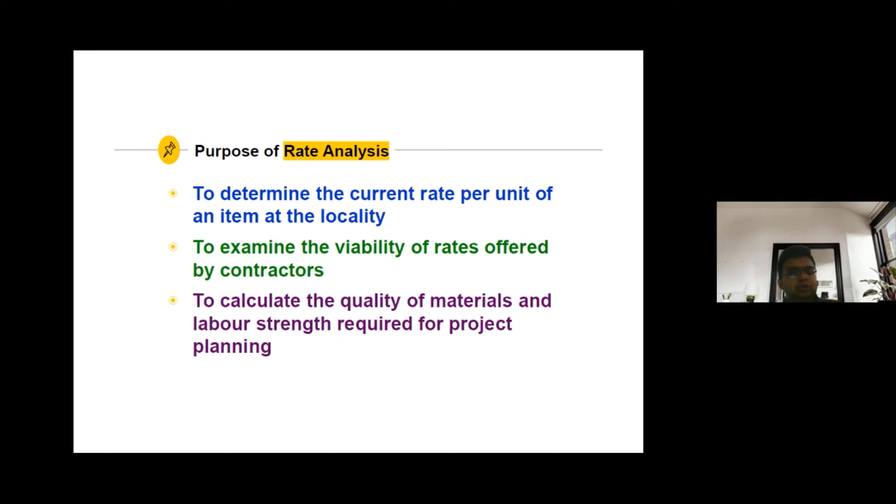The purpose of rate analysis is mainly to calculate the quality and quantity of material required according to the measurement for each cost item, done in the construction part as required for project planning at execution level. Each item is associated with a cost, depending on the unit of measurement for each prevailing cost. You multiply the unit rate into the quantity to get a total cost.

If you see the flow, there is the type of labor involved in the rate analysis, the cost of equipment or tools engaged, and some overhead charges. These overhead charges will be seen at the last stage of my presentation. First we will calculate the rate amounts with some examples, then we will cover the overhead charges later.

Starting with the detailed technical concepts of the presentation on rate analysis: the rate of a particular item affects the final rate decided, studied carefully. Each item's rate affects the detailed items, adding up on each task of the activity to give each cost data. So the main purpose of determining rate analysis is the item rate of items that could be floated, termed as rate analysis.

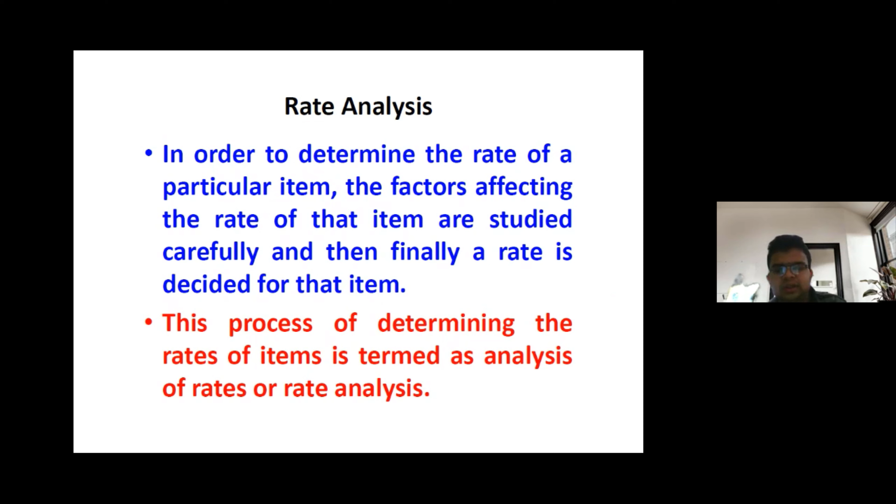The analysis of rate, if you see as part of construction projects in India or anywhere overseas, there could be a large number of activities that could have been split up.

Every construction activity consists of different types of civil or construction parts where you execute activities. As discussed, I've given a detailed example for students to understand where the analysis of rates could be prevailed, and they could come out with a detailed analysis part, with examples in construction buildings like excavation, earthwork, concrete work, masonry work in the substructure.

If you take any activity from the start of a construction project to the superstructure level, or come out with finishing activities, or MEP activities - for each activity there is a cost involved associated according to the BOQ floated in the pre-tender stage that will be executed by the contractor. These are some of the examples.

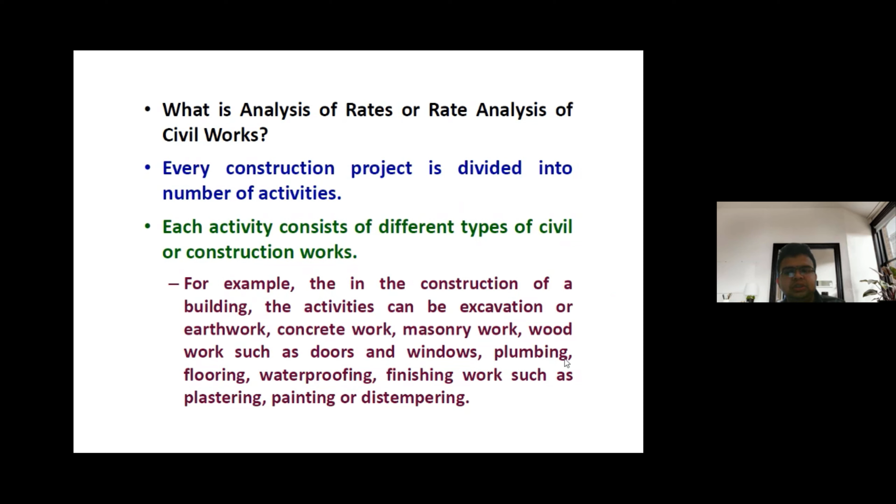Coming to the next part of the presentation, take the activity of earthwork. Suppose if I'm taking earthwork that could be divided into number of types based on the depth and type of soil conditions.

Suppose if I'm taking an MGL level of any kind of clay soil, and I want to do an excavation for 3 meters from MGL level to the bottom - from 1.5 meters you could associate soft soil. This is an example where you could understand detailed analysis of rate that could be floated here: excavation of 1.5 meters deep into soft soil, and excavation of 3 meters in hard soil.

So there are two variants you could come across in the presentation, identified in blue color mode: soft and hard soil. If you're doing 1.5 meters in soft soil, there could be an associated cost prevailing, because I need to do all my equipment, machinery, and all the resources that are engaged.

Soft soil is rather easier compared to going 1.5 meters below the level to reach my 3 meter level. So here you can see one variant is soft and one variant is hard. In this case, you could understand the analysis where you float from the variance, changing the level meter from 1.5 to 3 meter.

Here you could find that for 1.5 meter, the condition could prevail for the process of flow to happen, and for the next 1.5 meter where there is a hard strata, you could find another level. So here you will have various determined rate analyses that could be floated.

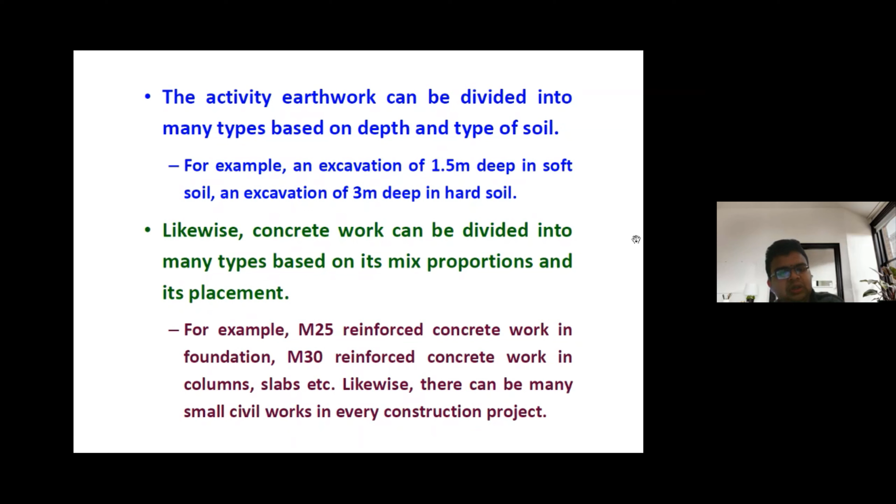Going to the presentation, here I have implemented some case studies so students can understand in detail the concrete mixed proportion, both theoretical and practical values, where we have done the rate analysis and how we could implement the analysis of rates pertaining to the original BOQ.

Before going to the flow of the presentation on concrete mix, I could say BOQ is BOQ - bill of quantities - where the quantity of each item, rate, or scope of work that you need to perform in execution, procurement, or at the pre-tender stage is determined in detail.

For each item, an item code is given, and you could find the length, breadth, height of each variant of the activity, along with a remarks column showing whether it is DSR or non-DSR. DSR means Delhi schedule of rate, according to each item of rate that could be preferred, or it's a non-DSR item.

So BOQ plays a vital role in any construction project where you're doing your execution completely, pertaining to the activity part. Linking why I would talk about BOQ - without BOQ, the analysis of rate could not be done properly.

BOQ is a justified document, a very authenticated document, where you could find the contractor has floated an amount of rates to pursue an activity, which he submits at the time of the running account bill, where the execution has already been completed.

Coming to the flow of the presentation on concrete mix - I have given for M25 grade of concrete, the ratio is 1:1:2. So if you need 4 m cube of M25 concrete, we need 1 meter cube of cement. This is the theoretical value I have put up in the presentation.

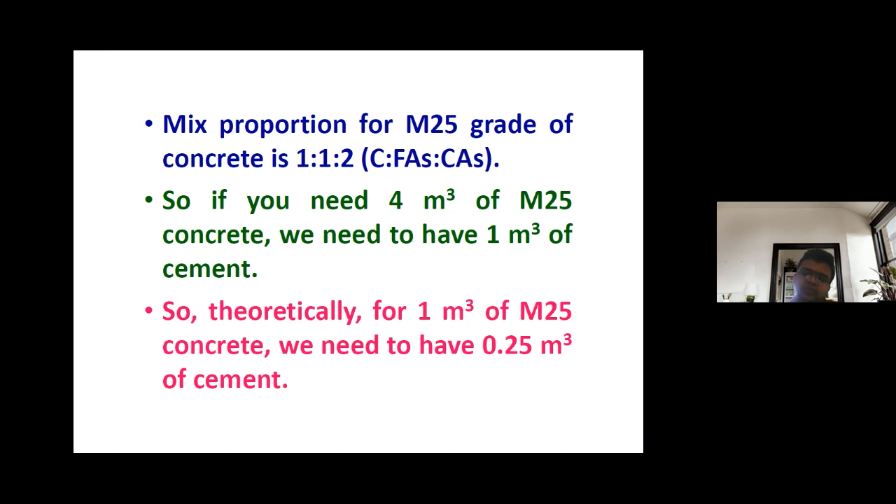Next, in the designation mix, I have given for each cube strength that you need to achieve. You know some cube tests are performed for 28 days to achieve the strength of the cube, pertaining to site level activities like slabs, columns, and RCC walls.

These are the molds which help determine accurate target strength. I'm not going into complete concrete technology and design parameters here, but the mix has some parameters that could be understood.

So the order is given so you can understand how to come out with various mix proportion grades according to where the rates fit exactly, and find the analysis of rate of flow for each item of work executed, if split up into detailed construction tasks.

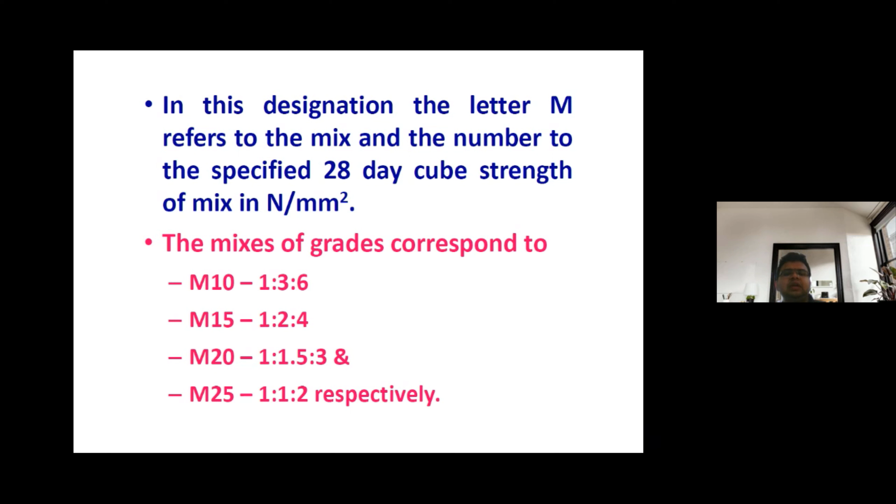So the cost of any construction project is calculated on the basis of each work associated with every construction. Each type of work you do for any activity or task can be considered.

Each task completed within the construction project is associated, where you add up all the costs. Then you get a complete picture of the cost to the particular item or task of the associated work in the construction project.

This is very essential, whether you're estimating for a small work or a large work in a construction project.

Suppose you take any site, or attend to very large projects, you'll see there are a number of activities associated to perform a particular kind of task.

For the task, you need to produce a detailed analysis of flow of rates, taking the scope of work already available from the authentication document, the BOQ, which we discussed before. Then you come out with rates, whether it's an item related to Delhi Schedule of Rates (DSR) or a non-DSR item.

If it's not according to normal conditions, if my remote site location has a prevailing rate particular to that state, you can take the local rates.

Some people follow a Delhi Schedule of Rates or normal local rates, which you fix for each item of cost associated, and multiply quantity into cost. This is rate analysis.

Analysis plays a vital role in civil engineering. From my point of view, going through this analysis determines the complete picture of cost concern, which you do for each construction activity, per unit of quantity.

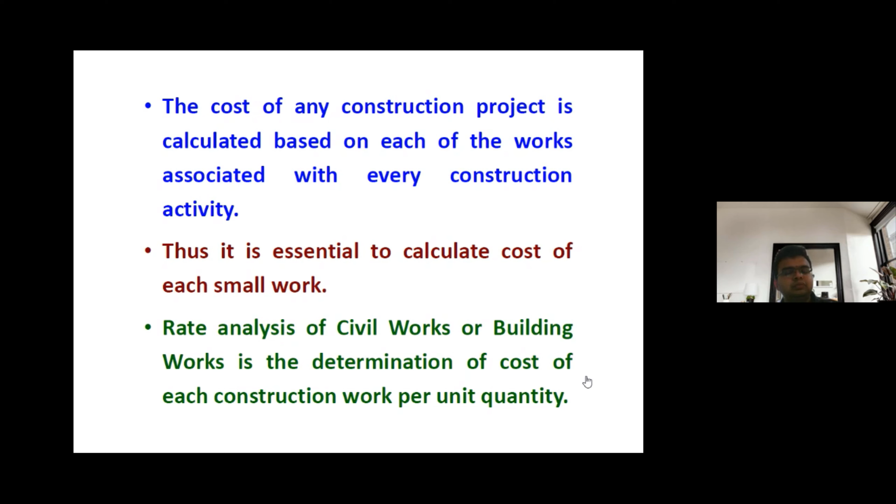Coming to that, the cost includes the various costs of materials which you procure from your store to the site or from anywhere, along with labor cost and machinery cost.

There's also the contractor's profit, where he adds his profit while floating a BOQ, with prevailing fixed rates depending on the type of contract. He gives the type of rates from his end to float the BOQ, covering each scope of item associated.

So here we have discussed the RCC work. I have added some recall examples for you to understand, for example, the cost of 1 cubic meter of M20 RCC work in slab and the cost of 1 cubic meter of excavation in soil of 1.5 meter depth.

So you need to do RCC work, the cost of the concrete quantity in cubic meters involved, and you could come out with a detailed flow of the analysis of rate, arriving at various cost parameters - where my cost is associated, what is my pre-estimate cost, and what is the cost given in the BOQ, which is an authenticated document. So what is my cost?

For example, if I'm going to do a square meter of plastering of 20mm, whether external or internal plastering, per square meter, here you can find examples of various specified items of work that are executed.

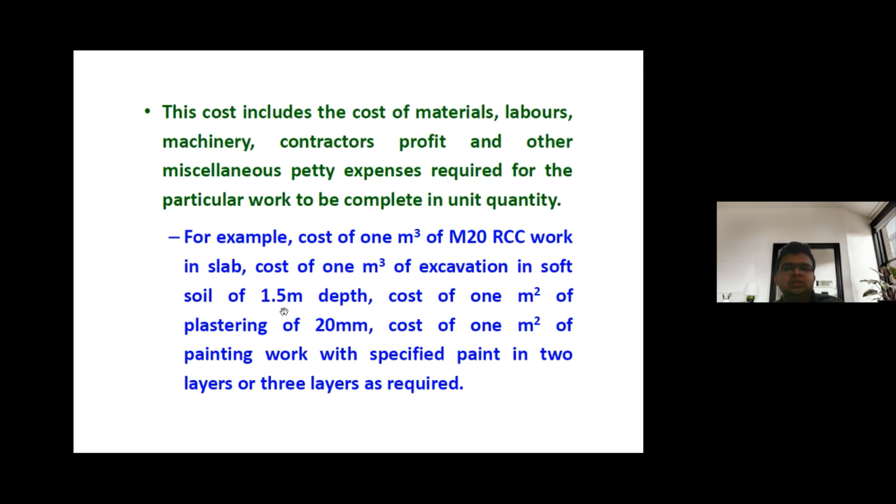So the cost of materials in the analysis will be calculated as a combination of both material - the original cost, transportation cost, and all the incurred miscellaneous petty expenses and overhead charges.

So you have the cost and transportation cost. Suppose I'm going to procure material from various sites, from the factory or fabrication unit to my site - the cost associated with lead charges, where the material is dumped, where it exactly fits into my site, and made available proportionately before excavation or before execution.

So you can find the various costs associated compared to the building-wise analysis point of view. If you see the third part, there are labor rates, where you find various classifications of labor analysis based on Class 1, Class 2. In the detailed daily schedule of rates, you find a systematic analysis of rates given according to Bhisti, Khalasi, skilled labor or unskilled.

Each analysis has the prevailing rate, and you come out with the various items to be executed. For example, as discussed before, for 1 cubic meter of concrete for RCC or raft foundation, you need to figure out how many resources to procure - depending on shuttering activity, reinforcement steel work, fixing the box for the raft, and complete concreting.

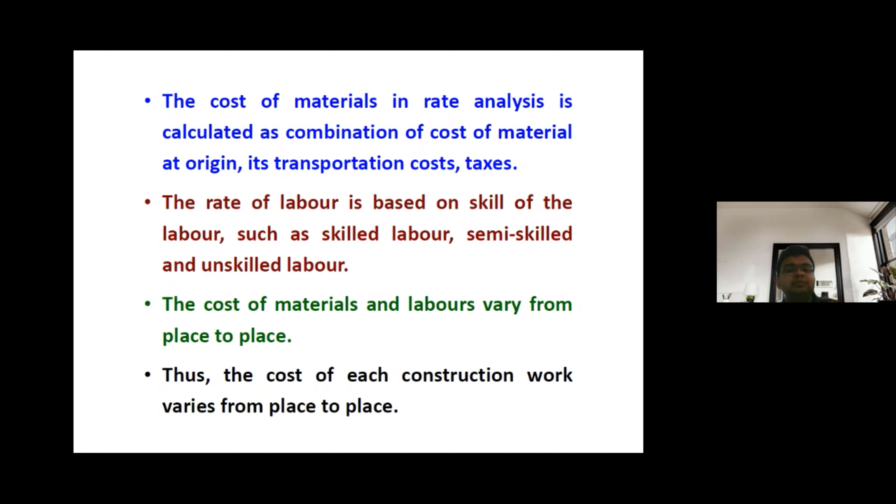So the need is mainly to work out the details of various elements constituting the cost of each item of work, where you work out the various cost elements and compare with the analysis. All the cost parameters could be implemented, so I need to discuss some analysis mainly needed in construction site working.

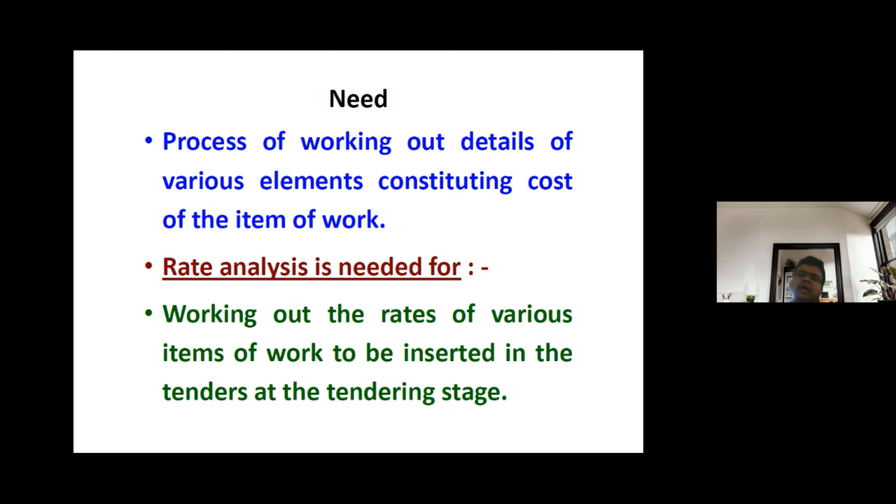The analysis of rates is used for working out items of rate to be inserted at the tender stage, where you could float a NIT in combination with CPWD or FIDIC projects. Here the contractor has to publish a rate, which is a very important authentication document where all rates could be performed and taken when the execution strategy is performed at the site level, combined in a way that I submit my running account bills so the rates exactly fit in. This helps in checking the reasonability of the rates to optimize the use of labor and machinery.

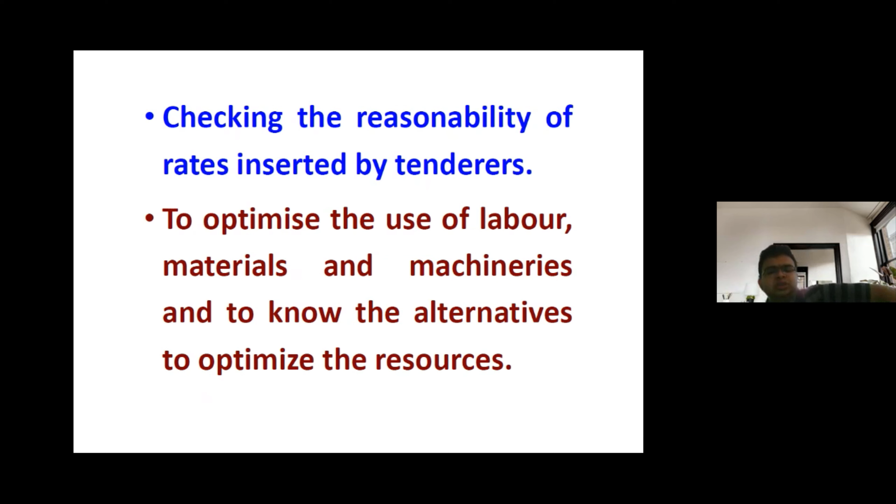So to optimize the resources in tendering, the contractor may easily calculate the cost per unit part of work where he could be involved in the various construction activities while quoting the rate.

In the Indian construction context, we could see some contractors float all the rates where they exactly fit in and come out with various rates for each unit of work, computed for the amount of execution or fixing for any kind of activity. This quoting of rates is involved in each construction activity for the justified quoted rates, which is already done at the pre-tender stage.

The client may also require the rate accordingly. Whether the contractor is in pre-tender, construction or post-construction stage, there's a strategy cycle where we compute the time-cost analysis. In the pre-construction stage, they do the entire analysis of rates. So if you take stage one, stage two, stage three...

In stage one, I do all the analysis. In stage two, depending upon the complete work, I get a picture where I could exactly do my execution and fit in. Compared to the contractor context, I could completely do my analysis.

In stage three, the client also has to know exactly what the contractor has added - is he adding profit charges, all the miscellaneous petty expenses, or submitting accurate rates equal to the client's expectations when procuring a fixed or other type of contract. The contractor gives a complete analysis picture of rates which the client could accept and calculate, since the owner is going to pay the complete cost while the contractor has to build and hand out the project. So he has to calculate the cost of each construction project where he exactly fits in, or accepts the values of the rate quoted by the contractor.

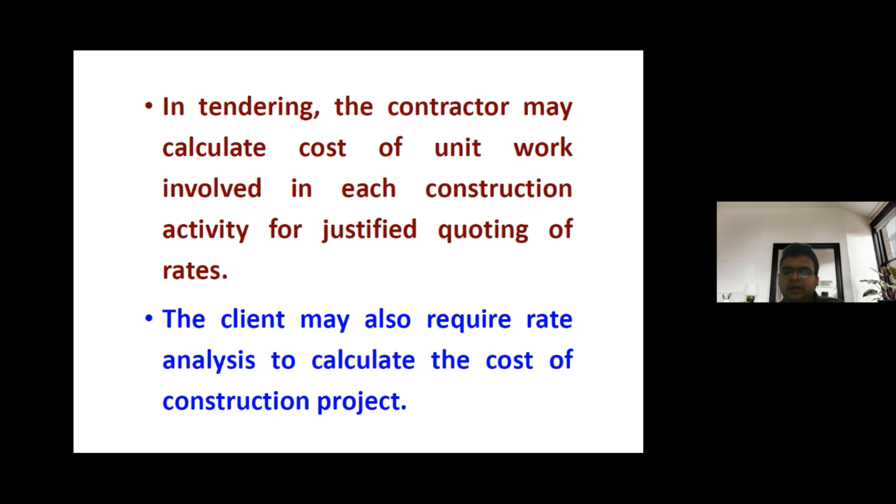Here you can assess the requirements of quantities of labor and machinery that exactly fit in, and what is the capital amount of work needed to complete the project—whether it's a huge raft, a G plus 12 high rise building, any finishing activity in each construction activity, or a unit item of work, along with time to time payment increases in material.

If you see some current prevailing conditions, like the huge impact of economic crisis where construction work has been stopped, the rate given in the BOQ could not be prescribed as current situations couldn't meet this factor. In this way you work out escalation prices, or cases where labor are unable to work at various field construction sites.

Then you come out with various analysis where the client or contractor plays a huge role, where the quoted rates will be fixed, or the authenticated BOQ needs to change, or they should submit an extra cost or item where labor or resources need to fit in for execution level in the construction projects.

So coming to working out the rates of the extra item or work to the builder based on actual cost—actual cost plays a very vital role here, as seen in the last point highlighted in blue. Actual cost plays a very identified role in a BOQ.

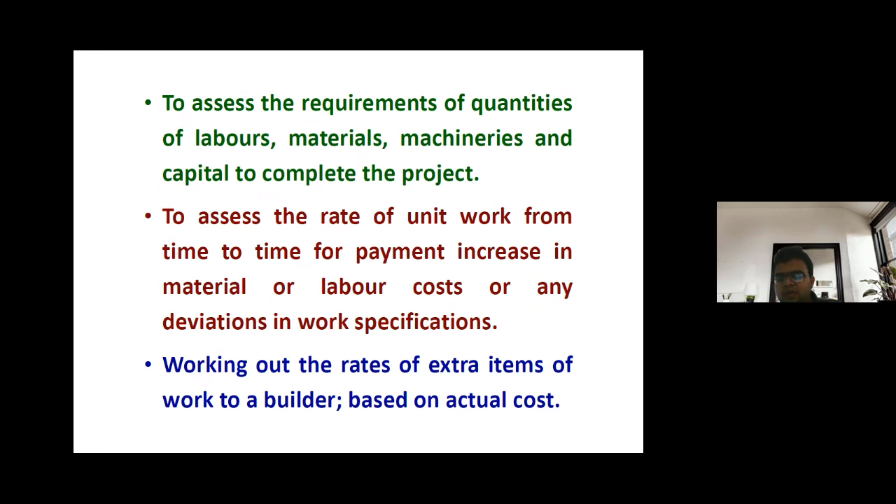So compared to the cost of the project, there is capital sanction of the project to be taken, necessary access, some capital amount that could be released in such a way where I need to make all the budget constraints, do my analysis, and come out with cash flow consideration.

When you already have a quantity in a BOQ, which is a very justified and authenticated document, and you multiply it by the quoted price a contractor has already given in a pre-tender stage, you get an analysis of rate. Before you get a net amount value, suppose you get around 1 crore or 2 crore estimate for doing a huge excavation kind of execution.

Then you could find how I can arrange my budget or cash flow provisions in such a way to execute the other activities that have been planned in the other sequential level of execution.

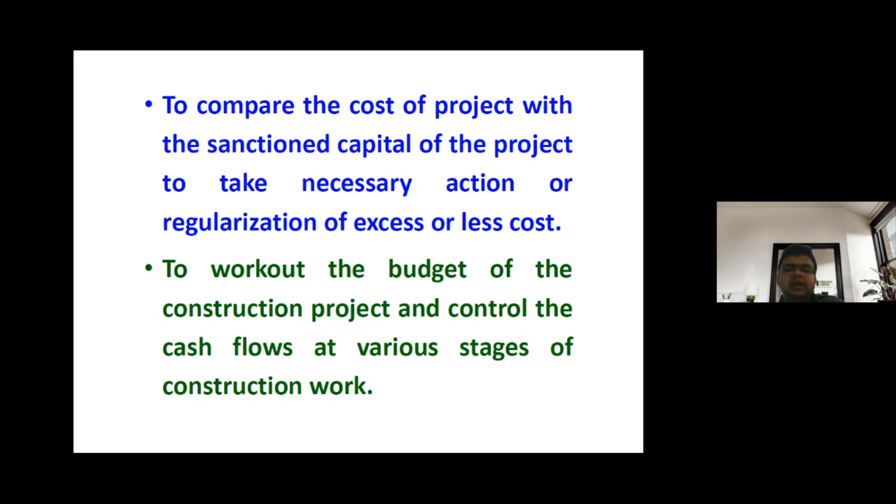Coming to the slides, you can find where irrational rates could be quoted. Irrational rates, in the sense, are various rates that could not be in such a way for each item of work quoted during the tender process.

It serves as a very basic data in case of a dispute among project between the owner and contractor. You could see if you quoted for 50,000 per activity, but during execution level, due to the current pandemic situation, the cost of work takes around 60,000. So there is a variation of 10,000.

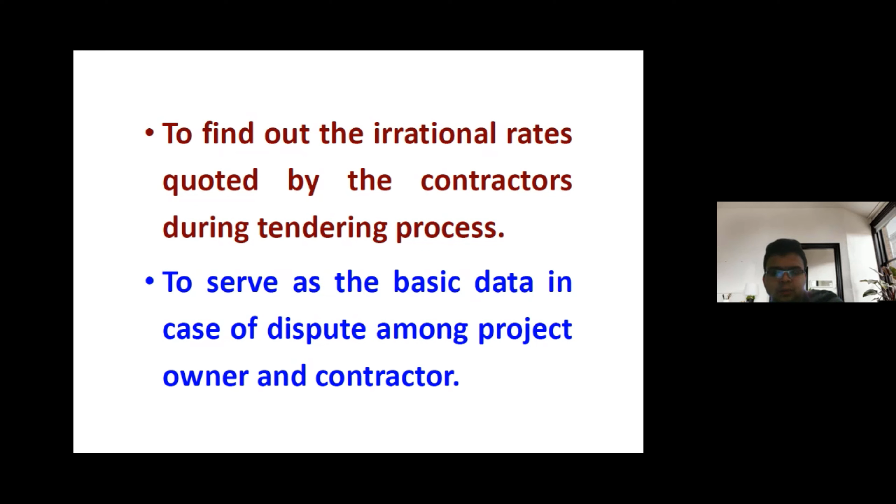So analysis of rate, or what is a justified document, you could come out with a BOQ that plays a very vital role in such a way you could fix a fixed amount of actual cost that could be defined according to the unit of measurement for each item, or for the resource constraint point of view.

Coming to that, to work out the economical use of materials and processes, to work out the cost of various items which are not provided in the contractual bond, it plays a vital role in the way the agreement or LOI work agreement has been provided between the contractor and the client.

You could see some items like the DSR or non-DSR items. Some items could be provided in the Delhi schedule of rate, while non-DSR, non-Delhi-schedule-of-rate items are those where some cost parameters have not been quoted by the contractor at the bid stage.

So it serves as a mediation authentication proof where analysis of rates could be computed, especially where the item of work is not mentioned in the BOQ according to the measurements.

So the schedule of rates should be revised to reflect increases in the cost of labor or material due to a change in technique. It involves various techniques and skills.

I need to perform strategies, I need to perform execution, I need to procure, I need to do any kind of activity where you could incur cost due to the condition requiring certain facilities, which increases the cost of material and labor due to the change in current situation.

You could take that as an example. So the concepts behind this, as I covered, help you understand the complete brief picture of the analysis of rates. Coming to the concept, understanding the various concepts of analysis of rates.

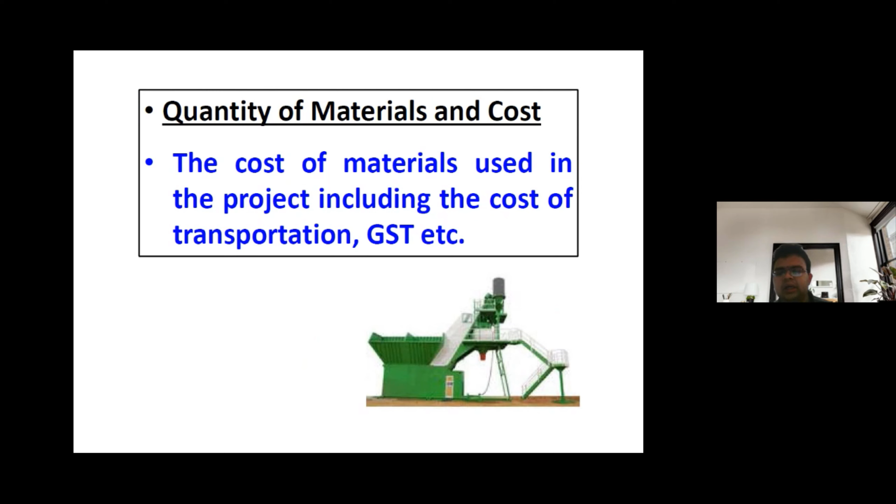Cost of materials at the source and site of construction are taken as delivered at site, including transport, local taxes, and other charges. Local taxes prevail according to the invoice, which gives a detailed picture of the analysis of rates when procuring any material, until you hand over the material to site.

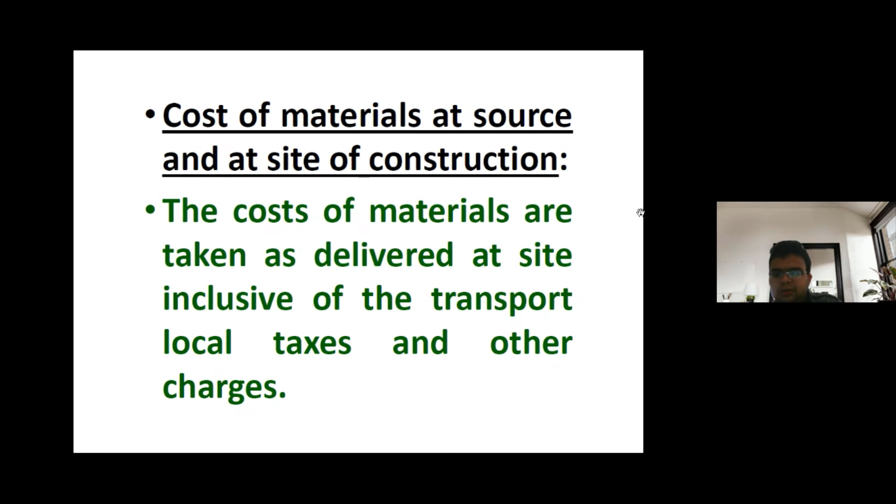Coming to other leads, some definitions here: when you do analysis of rates or a detailed analysis strategy, you come across terms like the lead statement. Here, highlighted in blue, the distance between the source of availability of material and construction site is known as the lead.

So the source of availability of material and the construction site - where the material is available to me and where my site is located - that is the lead.

If you take a lead statement and do analysis for procuring or fabrication, take newer examples like steel girders or beams or some prefabricated structure.

If you fit any material into this lead statement, you come across various charges, like needing to dump material in a wagon or big container, then adding all the transportation charges and freight charges.

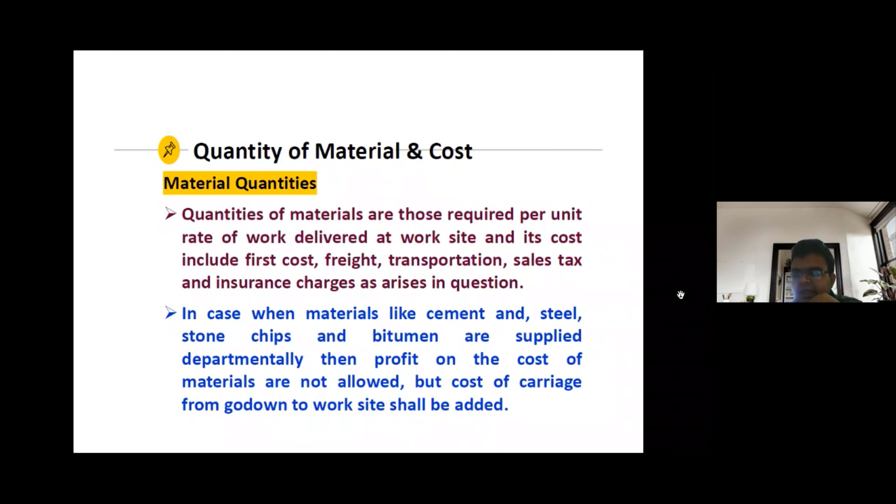Coming to this slide for your detailed understanding, you can exactly relate to the various cost parameters included, giving you a detailed analysis of rates.

This analysis applies in conditions where travel is expected over a minimum distance in kilometers, so the cost of conveyance of material depends upon the lead. The statement gives the total cost per item, for a number of items.

From invoice details, you come out with various statements involving how material should be uploaded to site, from procurement or fabrication strategy through to arrival at site, showing the various cost parameters involved.

This plays a vital role so that charges need not be borne by any third party. This mainly shows where exactly I can do my analysis of rates and prepare accordingly to purchase, buy, and transport material to site.

This plays an actual vital role - in cost detail, there are options where I could quote my lowest cost so that I could transport the material in such a way.

The statement gives the total cost for each item, including all costs - loading cost, unloading cost, stacking cost, all stacking charges, and all miscellaneous expenses - from there I could transport my material.

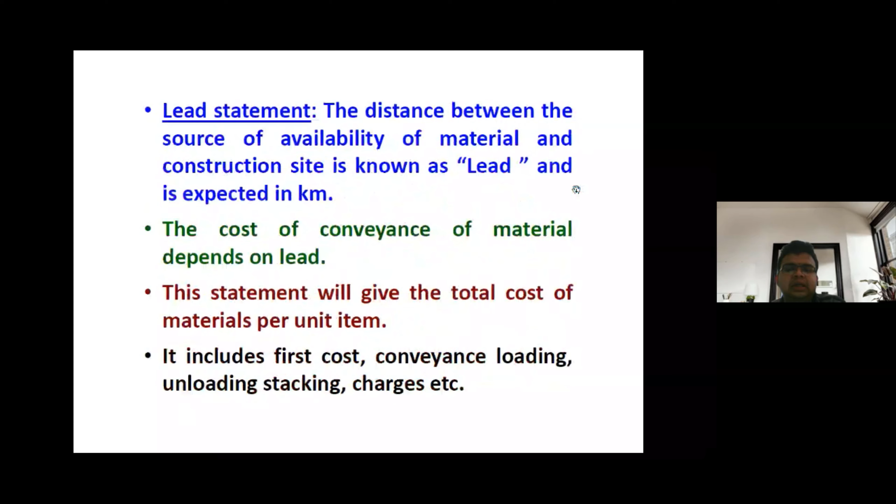Coming to the other slides, the rate shown in the lead statement is given here for metal tracks. This is research taken from other journals where for metal tracks and cart tracks, the lead statement is multiplied by a factor according to conditions prevailing on the metalled road, depending on the situation where transportation could be safer, to transfer material from fabrication to site level.

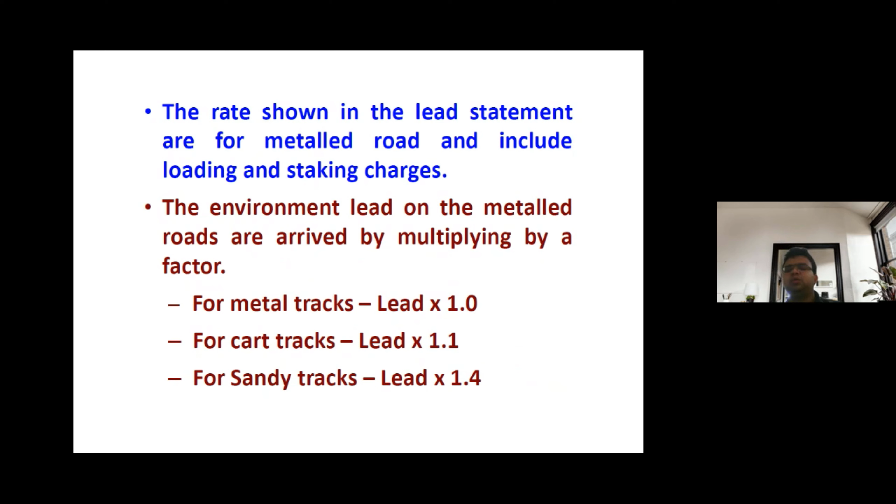Coming to the third part of my presentation, you could see some of the cost association concerns. Until now, we have gone through the detailed part of how we could do analysis for each construction item according to the unit of measurement.

In the second part of my presentation, I covered material concerns or lead statements. We went through some of these concerns so I could come out with all my stores or procurement levels where cost is associated with cost parameters, and did a detailed analysis on the flow showing how the cost of each item is involved in various roles or cost parameters.

So the third part of the presentation is labor cost, which plays a very vital role in construction projects in India, where you have different kinds of labor depending on skilled or unskilled status, and each unit of work that could be done. Compared to the Indian concept of projects currently, we convert to man-days and man-hours per day.

I need to work eight man-hours per man-day. You take what is my cost associated with that. You can't simply put in like 1,000 rupees for all the labor there.

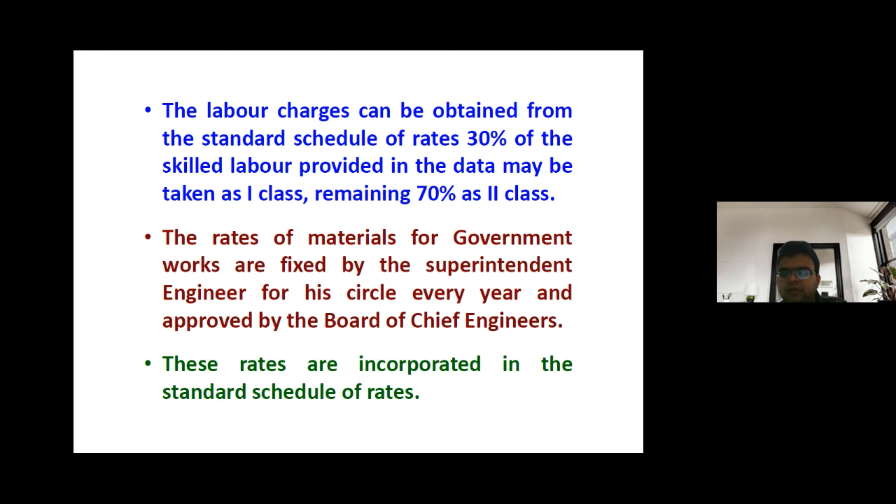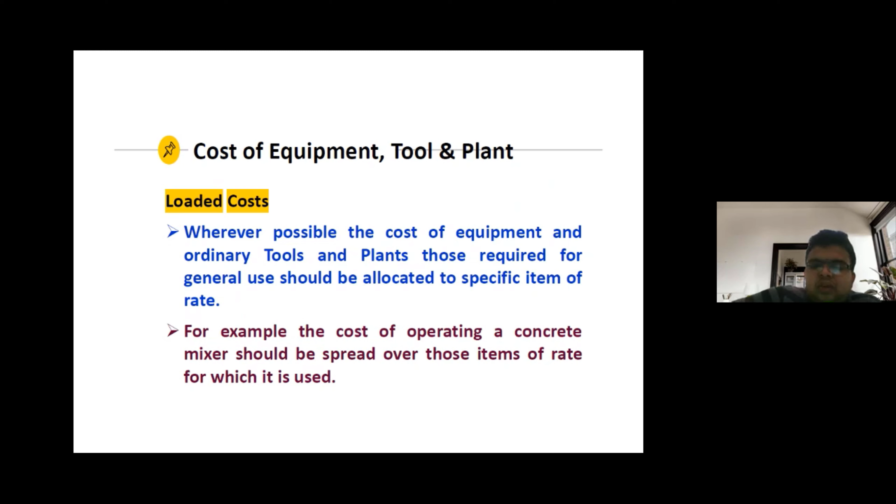Coming to the cost of equipment and tools, in construction sites various equipment and tools are required, generally allocated for a specific item of work, where I need to do grading and leveling of soil. I need my bobcat or JCB to fit in exactly, and what is my cost of operating the concrete mixer can be spread.

Here I have taken an example. You could see it spread over those items of rate that is used. There are a number of items, not only the concrete mixer - you could say a boom placer when it places my concrete. You could see the operation cost that could be per ton per day, where you associate it with the cost of materials and tools used at the construction site level.

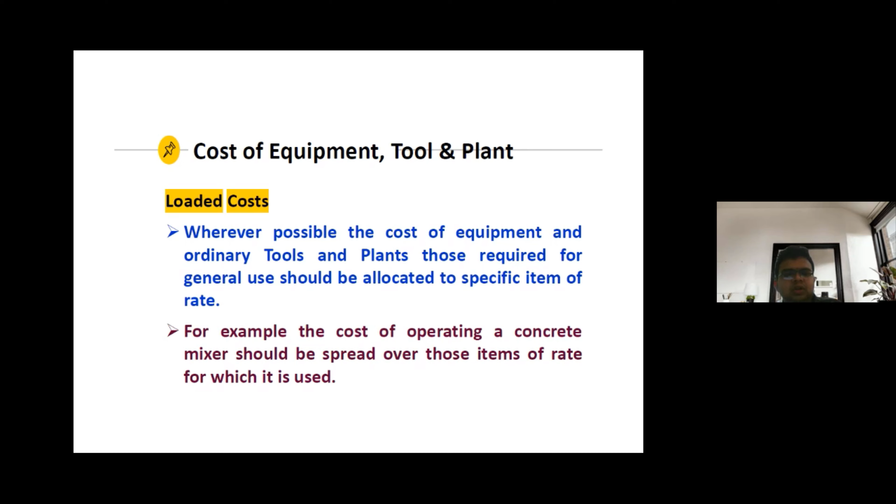Coming to a brief example, the equipment used in construction projects like paver, roller for infra projects or for commercial building projects - for scaffolding, where I need to fix my cuplocks. For fixing a small scaffolding, I need to fix my small coupler or raise my hydraulic jack level to level my slab according to requirement. So you could see the various costs associated with fixing a small scaffolding.

I need to engage all the resources, I need to mobilize, I need to keep cost of my equipment, I need to handle the various things in order to do a particular work. Here, analysis of rates plays a very vital role in which I need to do all the tasks.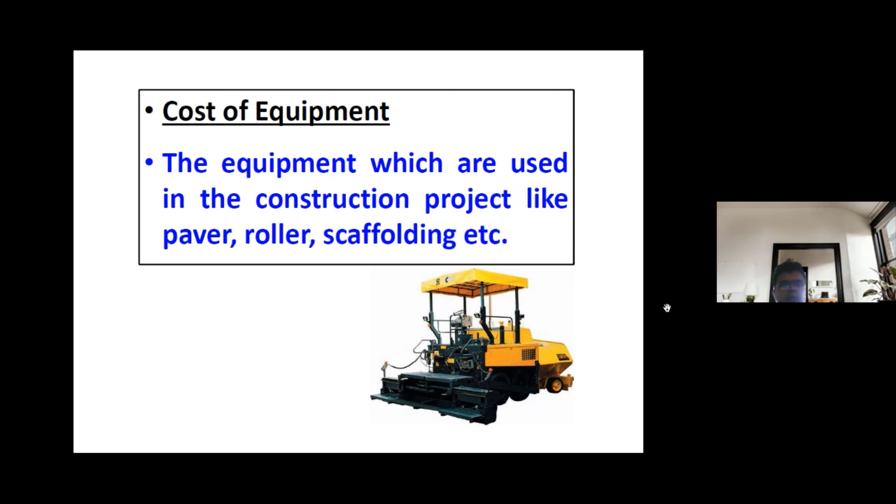So coming to the lump sum cost, it has been split into various costs. Lump sum cost, in the sense, is where the kind of overall fixed cost for certain tools is difficult to allocate to individual items of rates. Then it is suggested to add these costs in such cases of expenditure to overheads, where other tools and plants are difficult to allocate to an individual item - you can't simply give a rate for a grinding machine, like per 5,000 per day, something like that.

In such cases, expenditure on overhead establishment charges is involved. If I go for special tools in complex projects, it becomes necessary to use special concrete mixing tools like batching plants, where I can't engage all my RMCs to come daily, especially when my site is located around 30 kilometers outside the city limits.

So here I need to set up my concrete batching plant where I could engage special concrete transport vehicles like tipping wagons, dumpers, or cranes. To purchase such specific equipment, I could give a rough estimate percentage from the journals. You could see 1 to 1.5% estimate cost is already in the estimate, where I need to mobilize my machinery accordingly, transferring my complete RMC dumpers to my plant and to the site.

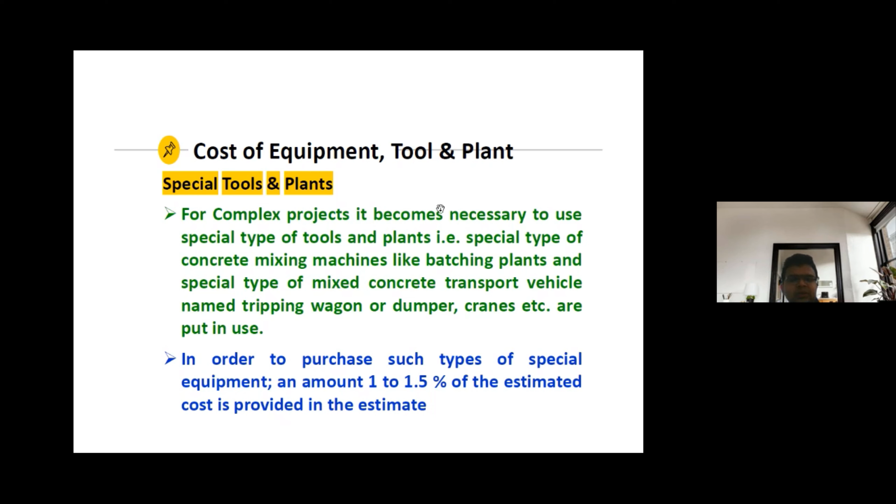So this is in the case of context in very huge complex projects, where you can give special cost parameters and implement them in analysis of rates. You could see some overhead and establishment charges like depreciation, office rent, and depreciation of the equipment.

Where you could see, if I'm going for TBM, tunnel boring machine, you could take examples like JCBs, or construction materials, construction tools, or huge machinery. Some other establishment charges included are salaries of office staff, postage, lighting, traveling, telephone, account plan, and such.

Small tools, planks, ladders, ropes, and such hand tools as the contractors provide for the workmen should also be included in the overhead charge. Why? Because these are all the tools that you use for the day.

That high cost is what we have discussed. Some of the overall associated cost is not worked out in the way you work with tools for each construction activity. Then you need to come out with what tools are needed for a simple staging or scaffolding - there will be a ladder to be used. You can't simply give a simple cost for a day that I have used; there could be a number of costs that would be associated.

This cost parameter has been split up accordingly in the overhead and establishment charges, where you can come out for each item, some extra overhead usages or miscellaneous petty expenses that contractors need to be involved in, as per where you float accordingly in the cost of the equipment. So I can see overhead and establishment charges.

In my case, as per the research, it's usually 2.5% of the net cost per unit rate. Net cost in the sense, what we saw before in the flow of the presentation - we have calculated all the costs accordingly for each item according to the quantity. Then you get a complete lump sum net cost, say around 1 crore.

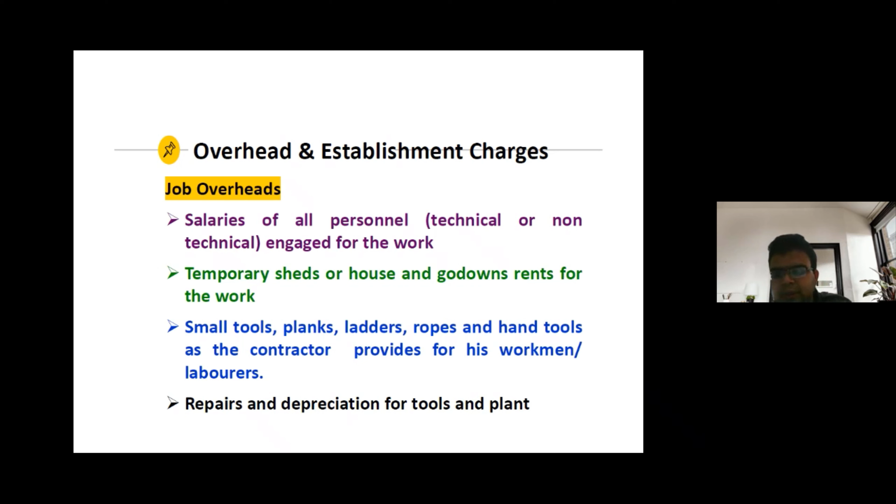And some depreciation cost where some machineries you could find that could be depreciated as the time age limit increases. So some of the job overheads you could see according to the split up in the establishment charges, as we saw general overheads, second category is the job overheads.

Lighting at site, some electrical lightings to be done where, even although during the pandemic COVID there was a complete shutdown, you need to have some electric current provisions to be operated at the site level. I need to do the establishment and mobilization of some established tools and plants.

You need to have a public relation. You need to come out with some labor measures and safety measures where you need to implement or monitor exactly according to various site conditions or provisions to be done.

And workman compensation, these are all compensation where according to the Workman Labor Act, that could be followed on what are the insurances. Like if you see comparatively, whatever if you are an employee in an organization or level, you could see some of the various cost parameters that could be assigned for your salary.

You could come out with the various provident fund. You could come out with the scheme levels, and so like that only. If you go to the various overheads accordingly in the construction part, you could see when you do analysis of the rates accordingly, various petty miscellaneous expenses that could be involved.

Accordingly, you come out with the various investments when an incurred loss has happened. So you publish a cost accordingly in order to overcome the loss or some of the debt. So some costs associated where you need to overcome that cost also have to be incurred accordingly. So that cost comes under the category of the job overheads.

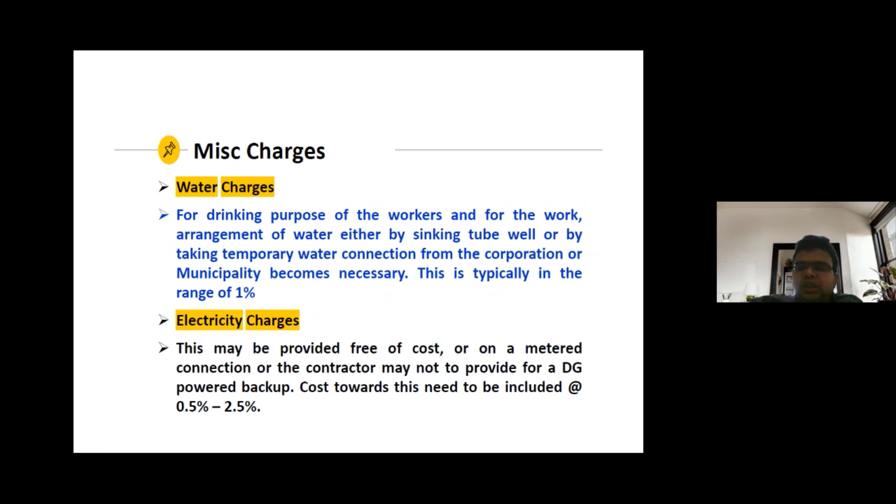Suppose for electricity charges, I have a 2 crore overall lump sum amount or net charge. For the overall 2 crore, I need to add 0.5 to 2.5 percentage to get my electricity level. Accordingly, the contractor or owner could justify the rate and pay based on the implication of the amount involved compared to the electrical or water charges.

For water charges, there would be a range of around 1%, though it's not exactly 1%, it varies around 0.5 to 1%. I've given it as 1%, where you arrange a temporary water municipal tap connection and do all the water charges accordingly from the overall net charge.

For your brief understanding, I'm repeating: the various net charges get added up into an overall lump sum net amount after doing all the cost estimates, like what we saw before for each construction item material, resource deployment or resource management, or construction tools or equipment. By adding all resources, quantity into rate, you get an analysis complete rate split-up factor, and after summation you get a net amount.

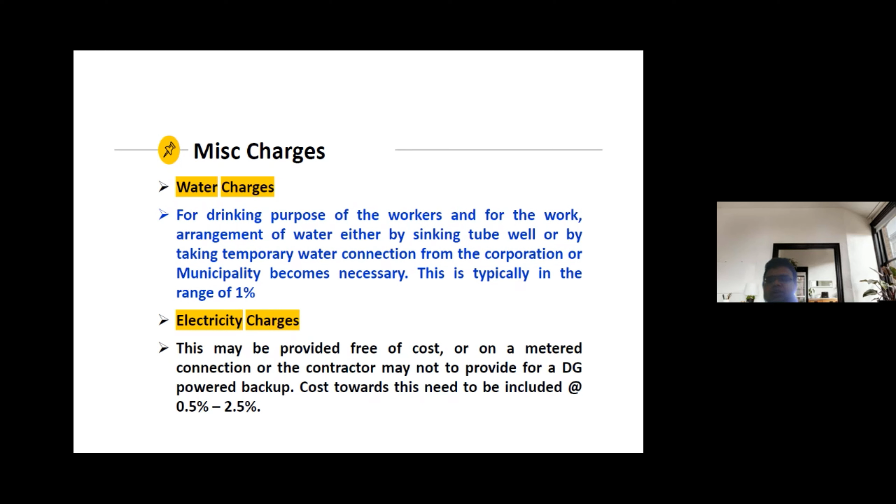From that net amount, these are all the charges added on above it, taking a percentage for each charge, so you understand the various miscellaneous charges that could be incorporated. The factors affecting the main rate analysis include some of the specifications.

Before going into these factors, let me give a small pop-up on the way specifications play a very vital role.

Accordingly, you indicate the quality or proportion, which grade of concrete you need to use, depending upon the type of specification. You come out with various rates accordingly. For example, some labor costs depend upon the type of class or skill, and the type of concrete or grade of concrete is also a kind of specification. So you don't know which cost to incorporate without this, and you can't simply allot a fixed rate per day to all labor. Depending upon the classification or type of skill or class, specification plays a very vital role.

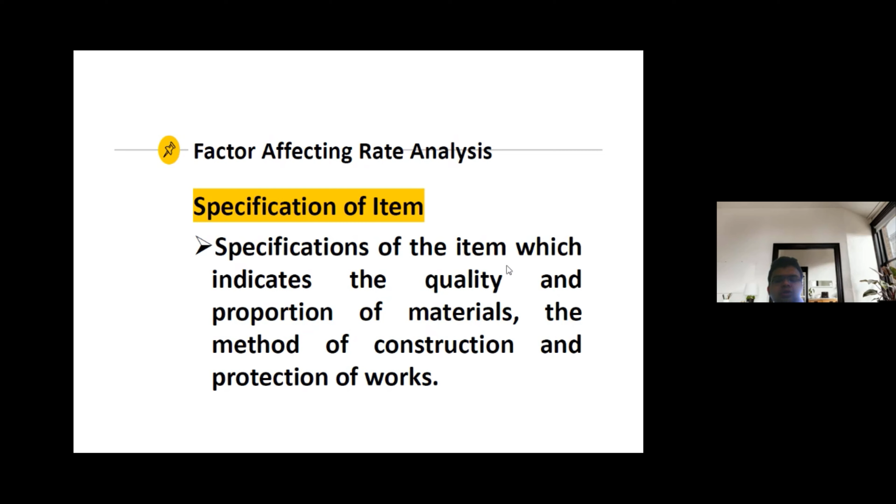Accordingly, you do the cost parameter for each material or concern. Coming to the rate of labor and material, where you work out at the site the present rate of materials for items of work, daily wages of different categories of laborers, according to the district schedule of rates, or you can come out with local market rates. The quantum of work depends on the constraints of the detailed specification.

For example, in excavation: if I'm going to do a 1.5 meter bottom-down excavation for soft soil versus hard soil, that 1.5 meter depth is a kind of specification where analysis of rates plays a very vital role. For your understanding, if I've done 1.5 meters bottom-down for hard rock, I need to incorporate that rate. So without specifying 1.5 meters, you don't know which quantity or amount of work you have computed, beyond just soft soil.

So that is a good example to understand these terms, and according to the quantum of work, you carry out analysis for each item of work in the construction project.

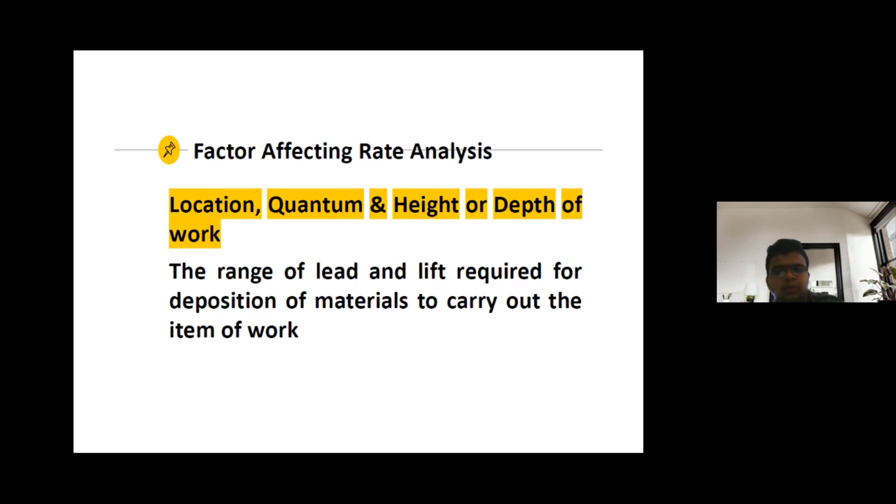Coming to overhead and profit charges: the percentage charge for overhead includes insurance charges, like any claim or damage that could happen according to policies, the range of profit in construction, and availability of water in connection with construction, along with miscellaneous profit charges. These are added to the net amount or lump sum amount estimated at the pre-tender stage, helping complete the picture of the rate analysis. The profit size varies depending on the size and type of the project, so you could see some profit considerations or the quantum on offer.

John sir, hello. Yeah, tell me sir. Sir, can you please give me a minute? I'll be connecting my charger. Okay, please.

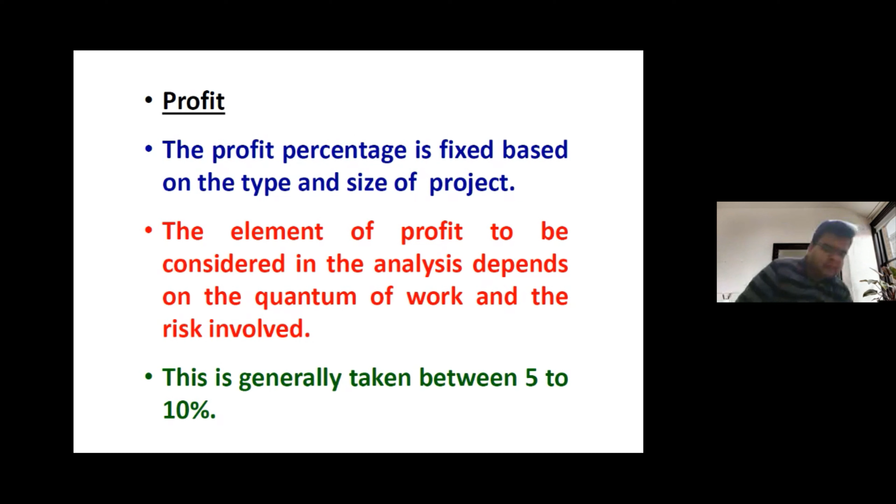Hello, yeah please go ahead, Sai Krishna. Sorry for the interruption in the middle. Actually my laptop was going to stop, so I had to connect my charger.

So coming to profit margins, you can find the miscellaneous charges we discussed before that get added in the overall net amount or lump sum amount when you've done the estimate. The profit percentage is fixed based on the type and size of the project. In normal execution projects, or in the Indian context, the profit varies according to the analysis and quantum of work, considering all factors of the analysis, quantum of work, and risk associated with the project.

In general terms, this is generally taken as between 5 to 10% as per research. Compared to this, you could see various miscellaneous or petty expenses, considering all charges and levies and miscellaneous expenses, besides the site organization cost control during execution, which should be considered as factors affecting the cost according to the unit of work done at site. So you need to consider all the various cost parameter controls.

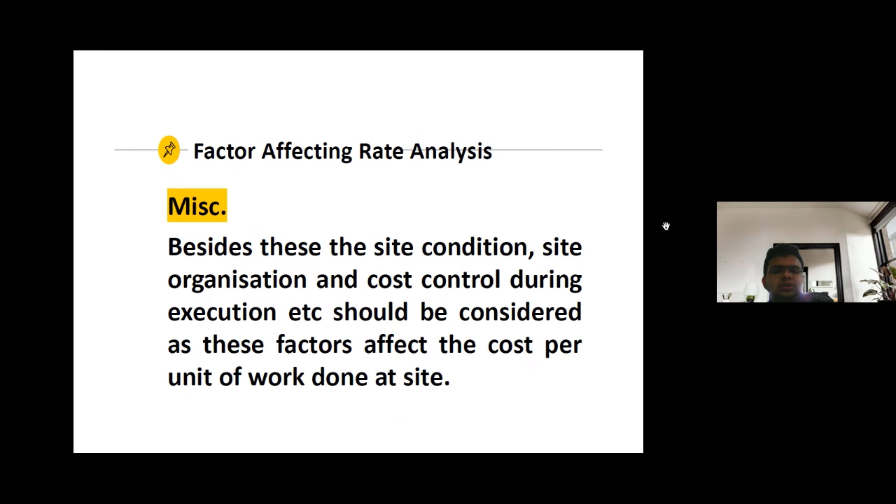Coming to this, note that while considering the rate analysis for different tenders, the quantity surveyor should take into account the work already in hand and allow an element proportional to ensure competitive prices. You do your work according to the quantum of work done in various types of projects, as discussed earlier, and this depends on the kind of quantum of work done according to variation in prices to ensure competitive pricing. You could see some 2 to 5%, depending on the turnover of the firm, varying from company to company according to the profit margin distributed.

So some of the site charges include details I've involved for your better understanding. You could see salaries for the engineer, quantity surveyor, or other admin and technical staff. All the charges where I need to establish, operate, and see all my consumables, site expenses, postage, and stationery, as we've seen in detail, plus miscellaneous charges and other overhead and general expenditures.

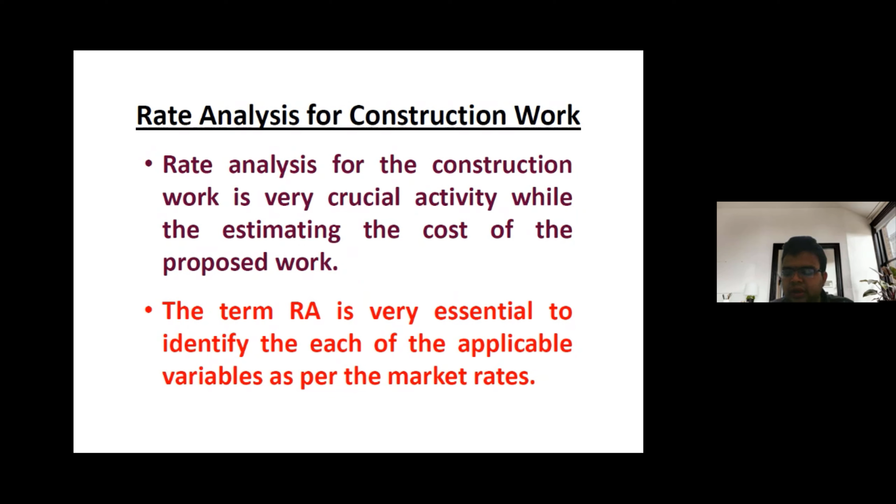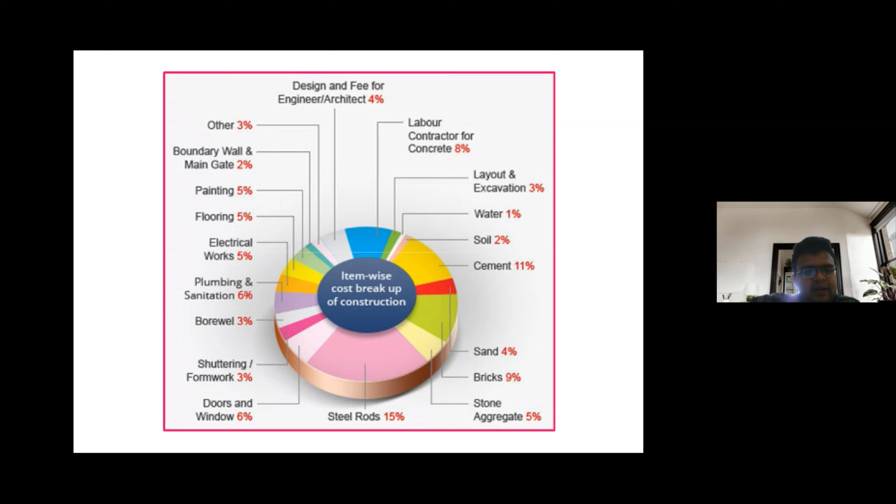I guess from my end, this is the end of my presentation for the day, where the main mode of the presentation involves completely relevant examples, so that students can understand in a very detailed manner. And I would suggest all my students, sir, hello...

Please, they could work on some of the various cost parameter concerns and the analysis of rates, comparing to the Delhi schedule of rates, taking DSR as a point of view, as an authentication document. If they work on some activities compared to the rate analysis for each kind of task, for slabs or other works, then they could come out with the whole picture of why rate analysis plays a very vital role.

Am I correct? Yeah, yes, you're right, Sai Krishna. Now friends, thank you all for joining. We've got about 20 people on the list here. Although we are not able to see the names of people, most of the questions are also asked in anonymous mode. Anyway, I don't see why you should not ask in anonymous mode, but in any case, I thank all of you who have.